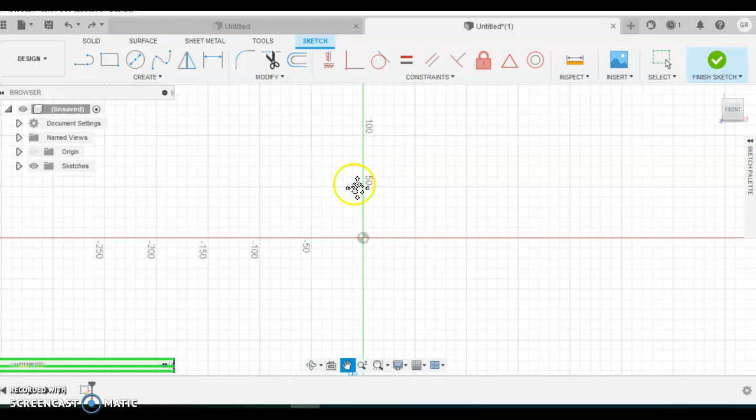If we start with the line tool, hang on a second, I'm just going to move this down so we can see what we're doing. Start with the line tool. We're going to draw, I guess, what you'd think of as the middle of the bottle, a line running up through the middle. So just one line, hit escape on the keyboard.

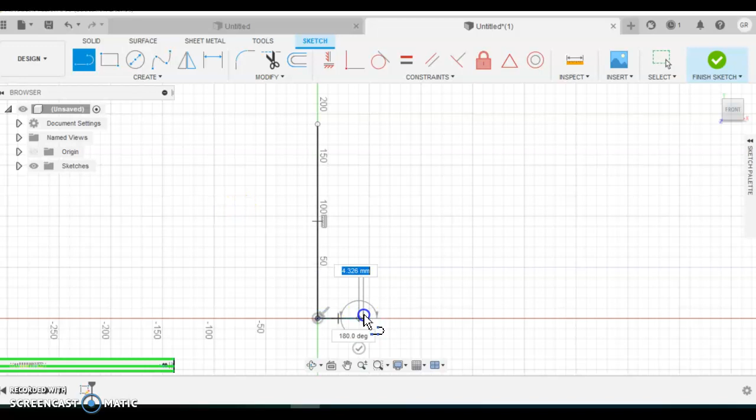Now we're going to draw the base of the bottle, but we're really only drawing half of it. So the radius, you'd come out for the radius. Click what you think looks right. There's no measurements here. Then we're going to attempt to draw something on the top of the bottle.

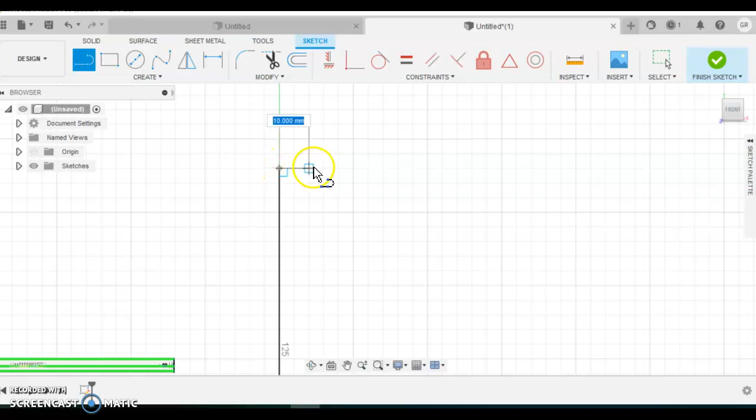To do that, I'm just going to roll my mouse and zoom in on the top, because otherwise it's going to be very difficult to draw. So we want to go across for the top of the bottle. Remember, it's going to be a bit smaller than the bottom. So I think probably about here. Then I might just escape so we can see what we've got.

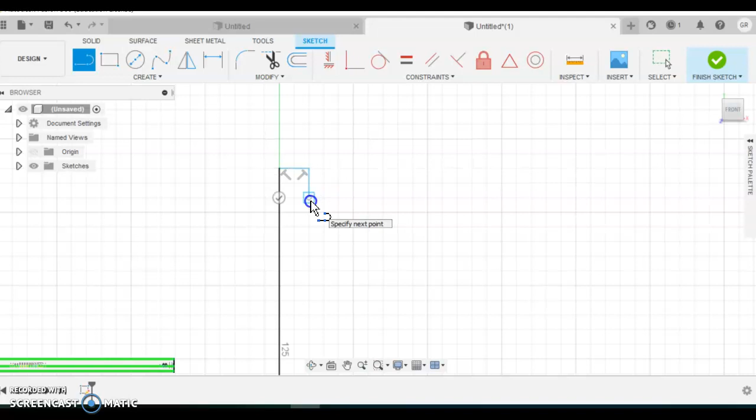We'll hit this again and I'm going to go down to make like a cap on the bottle. Then I'm going to hit escape and once again zoom out using the roller. Then get the pan tool, move up so you can see what you've got. Hit escape again. So what I want to do now is make a shape that goes like this.

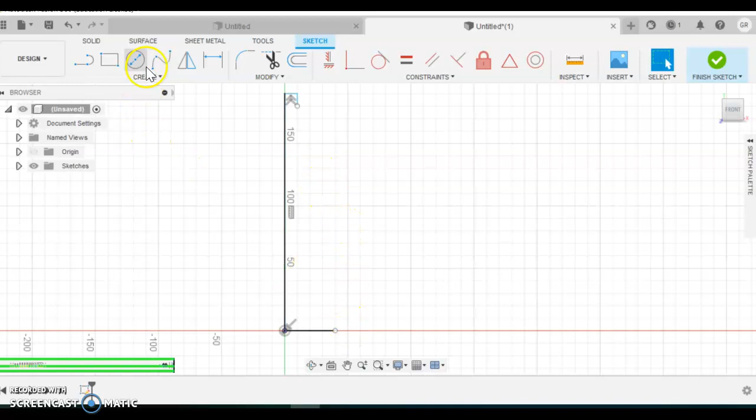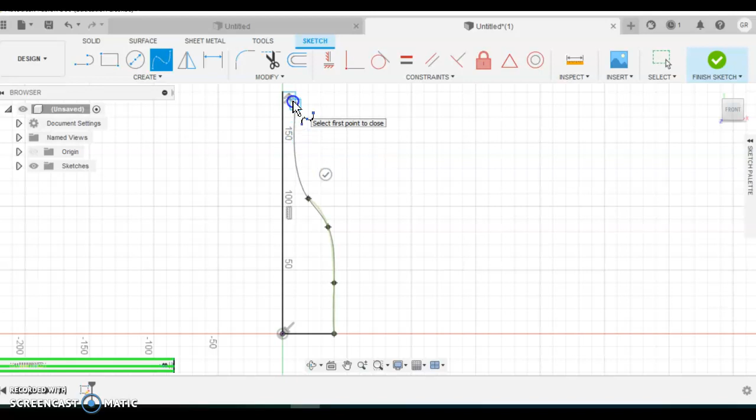So I think the spline tool might be good for this. The secret with the spline is you need to click pretty much wherever you want that shape to turn. So when I'm using the spline, I'm clicking lots and lots of times with that tool, and then it's telling me it wants to meet up the top there. So I double click to finish it. I know my shape is solid because it's gone blue.

I finish my sketch and go back to my revolve tool. I've got my profile selected and my axis is this one here. Okay, so that's kind of going to make a bottle shape.

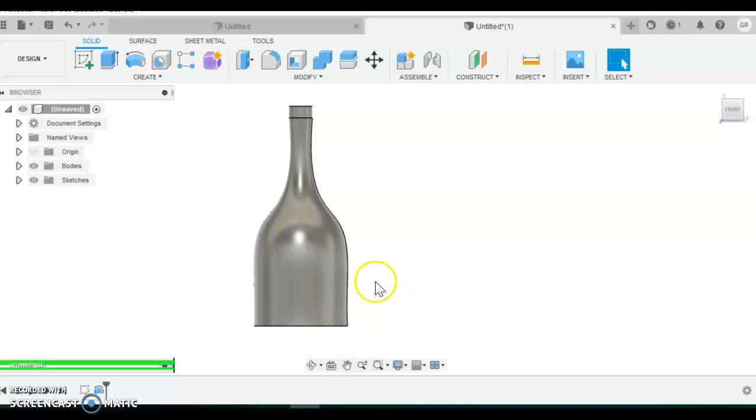If you're actually going to do this, you might want to play around with that shape to get it right. You can also use this fillet tool - I'll just rotate it to see what I've got. You can use the fillet tool to make the bottom a little bit curved, and you might play around with that measurement to get it quite right.

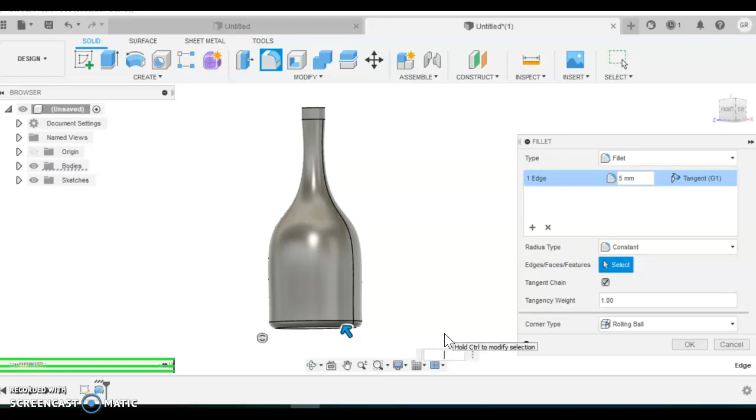What does 10 look like? Yeah, 10 looks okay, so I'm just going to leave that there. Same thing with the top, you might want to fillet the top as well.

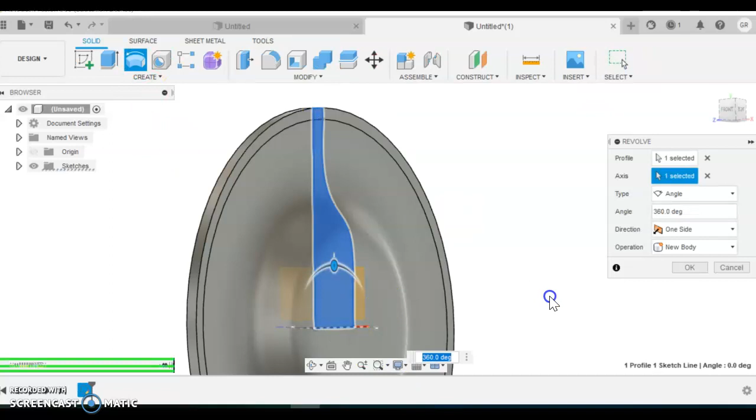Just remember too that with revolve, you know, sometimes it's fun just to click another axis to see what sort of shape you get. That is quite bizarre. That's not something that I would use, but yeah, it's just something you can do to see what sort of different shapes you get.

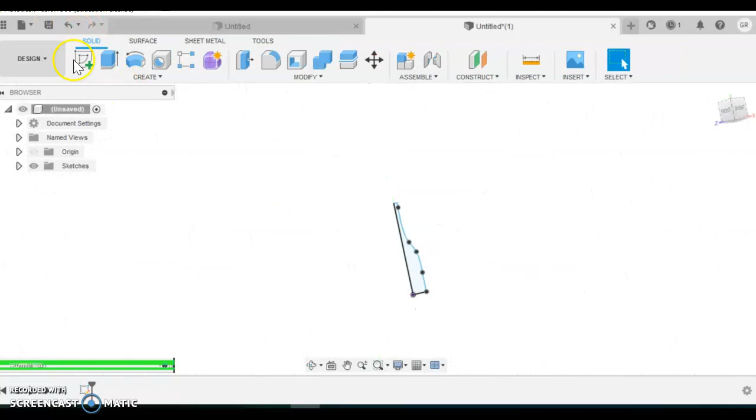I'm just going to redo this. So that's the bottle shape.